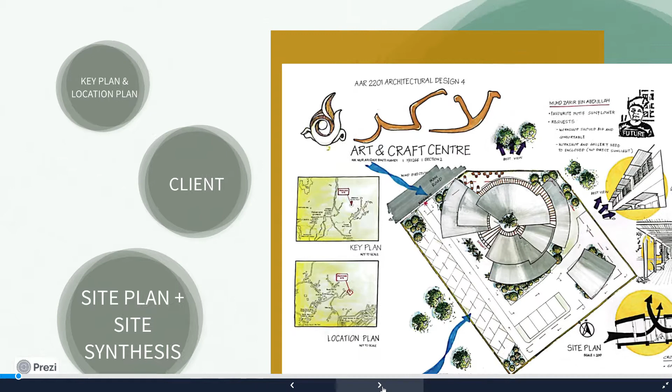My site is located at site C, Kampung Sungai Pusu, Gombak, Selangor, around 10 minutes from UIA Gombak. The client was Mr. Muhammad Zarir bin Abdullah, a woodcarver from Kuala Besut, Terengganu. He is one of the famous woodcarvers in Malaysia, and his favorite woodcarving motif is sunflower.

His request for the art and craft center is that the workshop needs to be big and comfortable, since we need space to put big machines and wood for carving. He also needs an enclosed workshop and gallery to avoid any direct sunlight coming in that can defect the wood.

For the site plan and site synthesis, the building has elaborate sunshade to avoid any direct sunlight entering the building that can defect the wood. The building also has a veranda for viewing and relaxing, and gaps for better cross ventilation.

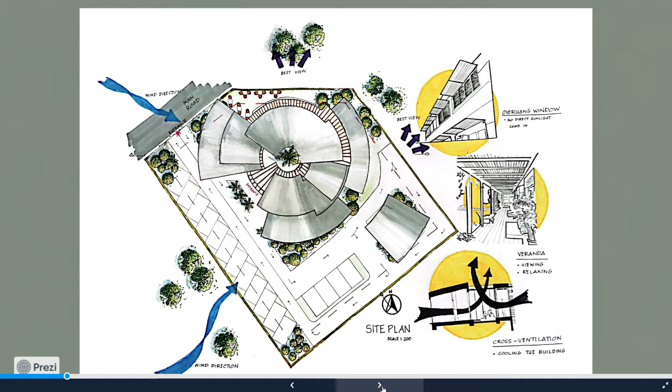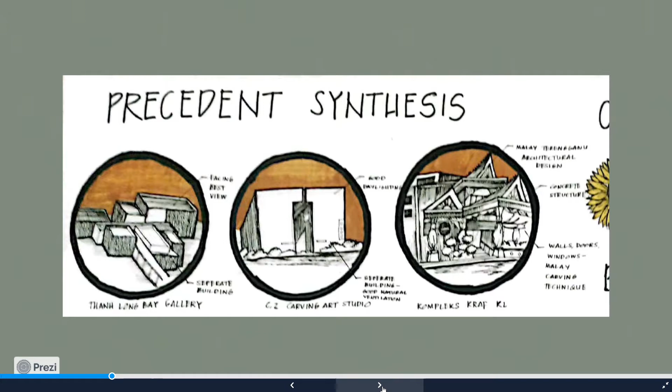From the precedent synthesis, it was concluded that the building needs to be separated for better natural ventilation, facing the best view and implementing Malay traditional carving on the wall, door and window of the building to show Malay contemporary design.

For the case synthesis, the exhibition hall needs to have artificial lighting to highlight the art and craft wood carving, since the craft needs to avoid any direct sunlight too.

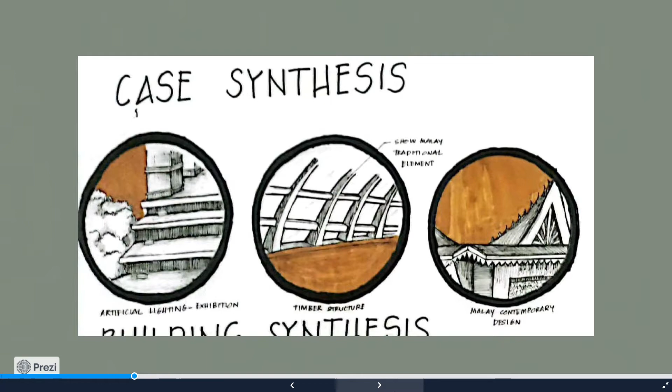The building synthesis shows that the buildings need to have different levels of steps for different spaces and functions, similar to a Malay traditional house. The building also needs to apply wood carving on the wall, door and window to show Malay contemporary design, just like the client asked for.

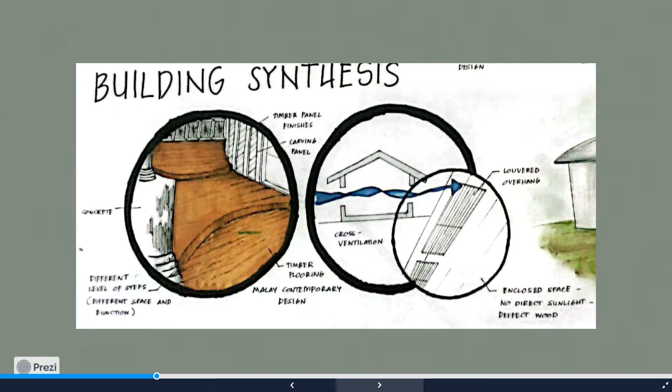The concept is centralization, derived from sunflower, the client's favorite motif for wood carving. The centralized building makes it stand out in the middle of nowhere and has a 360-degree view.

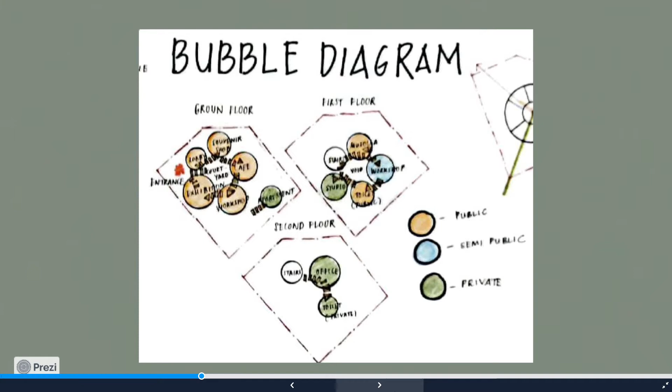From the bubble diagram, the ground floor spaces are mostly public space. But on the first floor, the area becomes semi-public, and the second floor is totally private, for the staff and the clients only.

Design process started when the best view and the main road exist, integrating with each other to create a central point on the site. Then it was made into a circle for 360-degree view and divided into 5 parts of space for different spaces and functions.

A gap was put between two spaces to create cross ventilation on the building. The building was connected through the open space veranda.

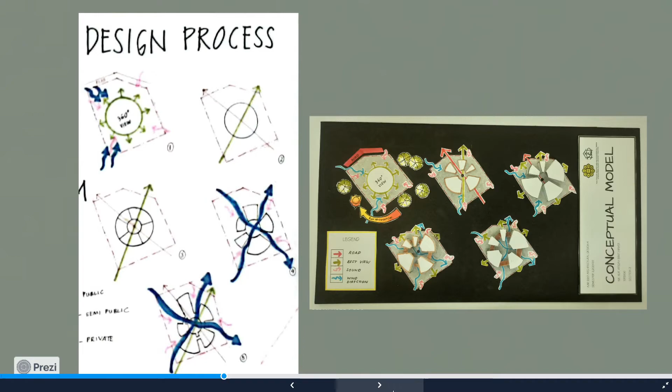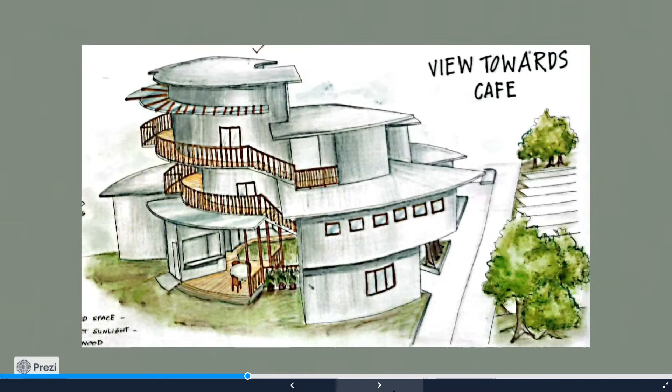The souvenir shop can be entered from outside or inside the building. There is an open space cafe concept for better viewing and ventilation, since the cafe is a place where people want to relax and have fun with friends. The cafe faces the best view of the site.

As we can see, the exhibition hall doesn't have any windows since it uses artificial lighting and wants to avoid any wood defect caused by sunlight.

The small apartment for the client combines living space and bedroom, a kitchenette, dining area, bathroom and a workplace for him. The sofa is portable and can be turned into a bed for the client to sleep on.

The apartment is needed for the client to stay overnight since he is from Terengganu and must be tired and want to spend the night there. The reason the apartment was separated from the art and craft center is to make it easy for the client to access his privacy space even after the center is closed.

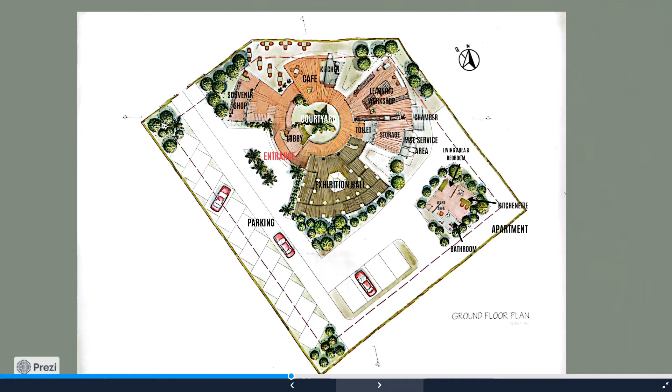On the first floor, there are a musolla, semi-public workshop, public toilet and designing studio. For the semi-public workshop, visitors can only see the wood carving process from the outside. The difference with the workshop on the ground floor is that it is used to teach visitors or new carvers how to carve.

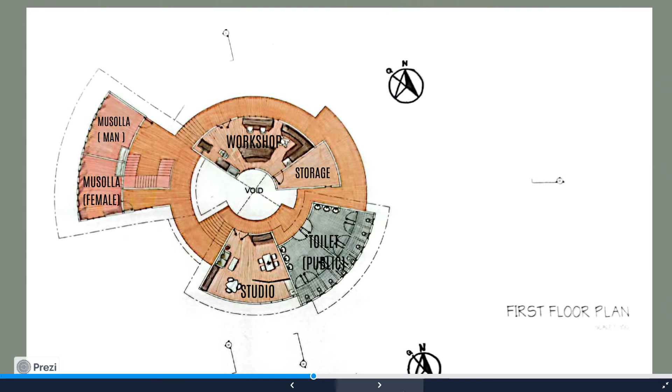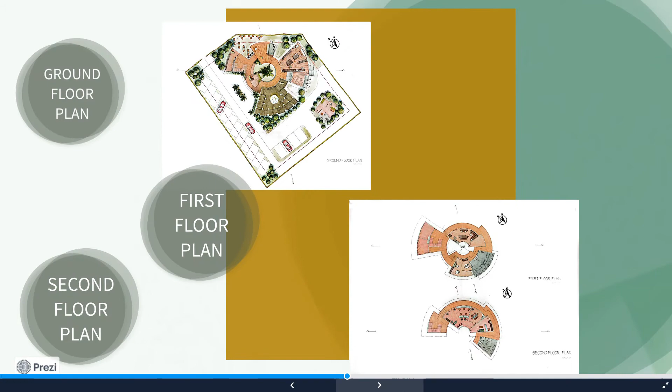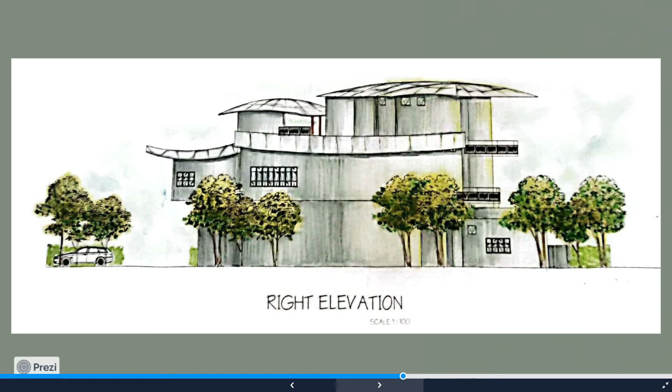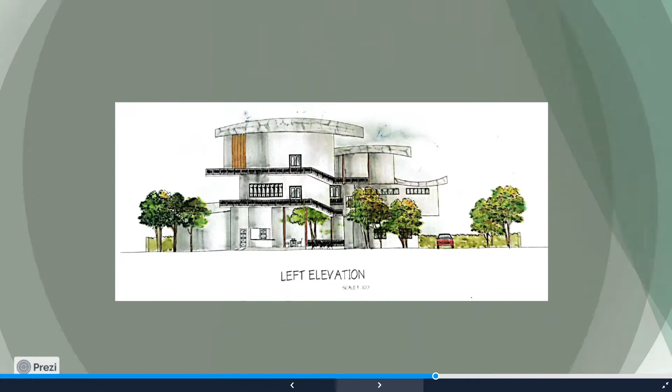Next is the elevation of the building: front elevation, right elevation, left elevation, and rear elevation.

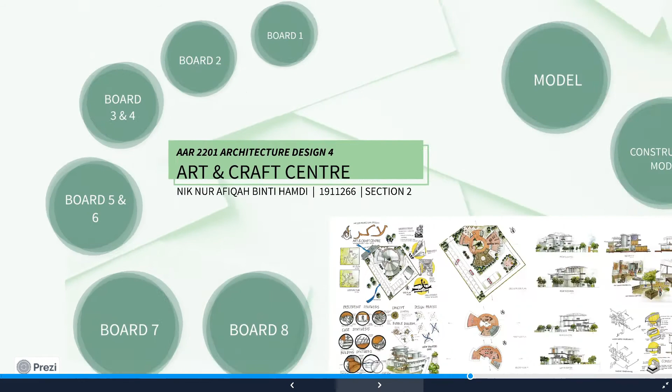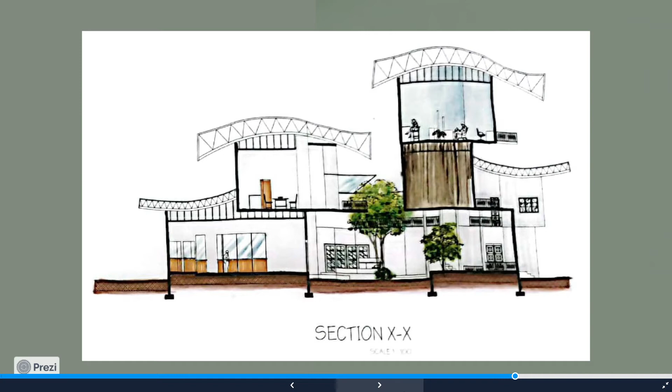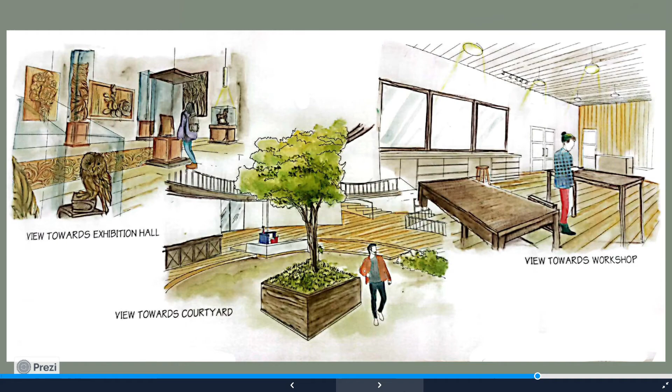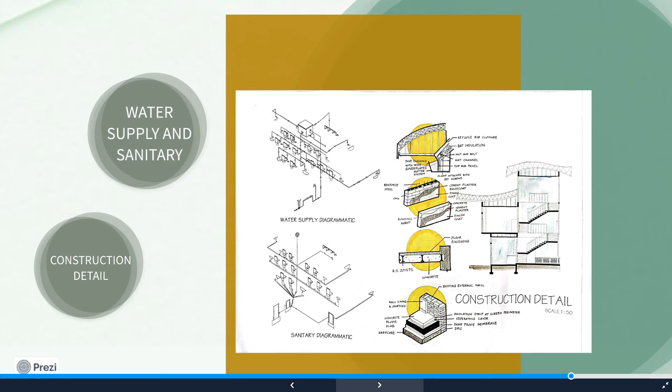Next is the water supply and sanitary diagrammatic, and the construction detail of the building from the foundation until the roof.

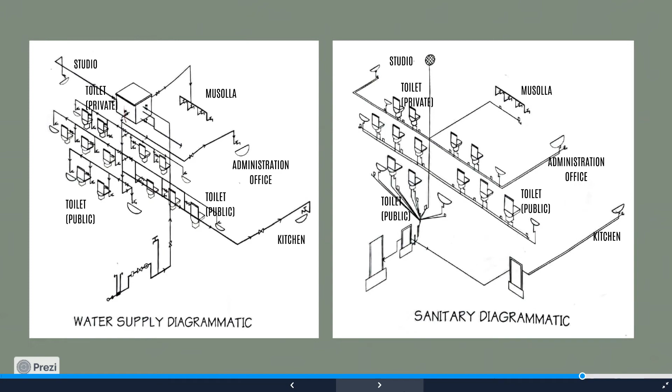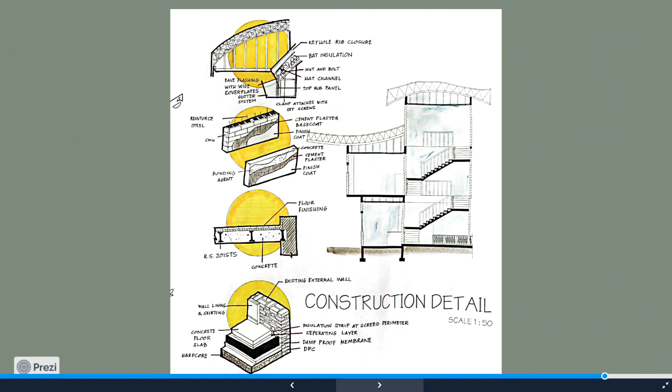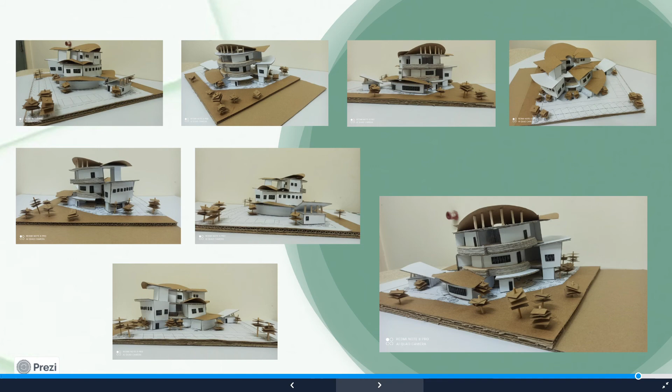And the last one is the construction model.